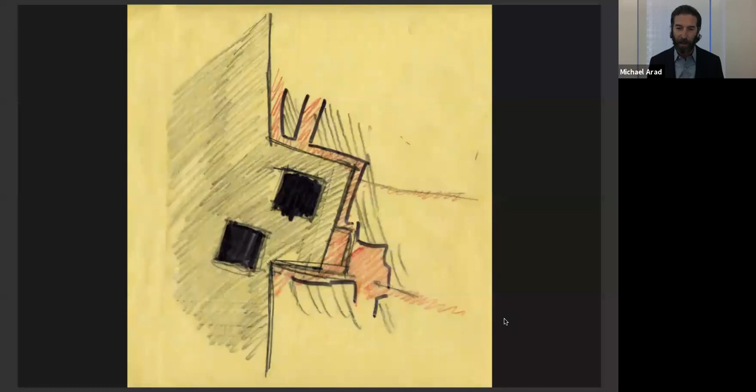I think I felt compelled to think about a memorial because of not just witnessing the attack, but witnessing how New York responded to that attack. So I ended up taking that sketch and building a small model of it, a small fountain that captured that idea of a tear on the surface of the water. I took it up to the rooftop of my apartment building in the East Village, where I had witnessed the second plane strike the South Tower. I could see the absence of those two towers in the skyline somehow mirrored and reflected in these two voids in the foreground. I did this in 2002, 2003.

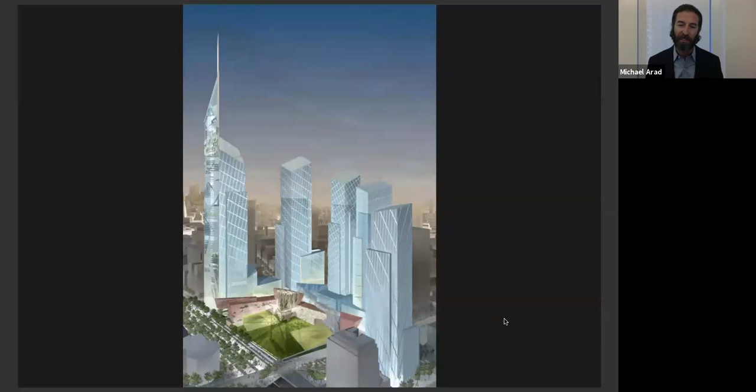This was before a competition was announced for the design of the site. In fact, prior to the competition for the design of the memorial, there was a competition for the design of the master plan for the site. You can see up here on the top left side of the screen, Daniel Libeskind's master plan, which restored the 16-acre super block, the site of the World Trade Center, back into the urban grid by letting Greenwich run through the site, running north-south, as well as Fulton running east-west, in effect subdividing the 16-acre super block into 4 smaller blocks. The largest one, about 8 acres in size, was set aside for the memorial, as you can see in the materials here that were part of that competition brief.

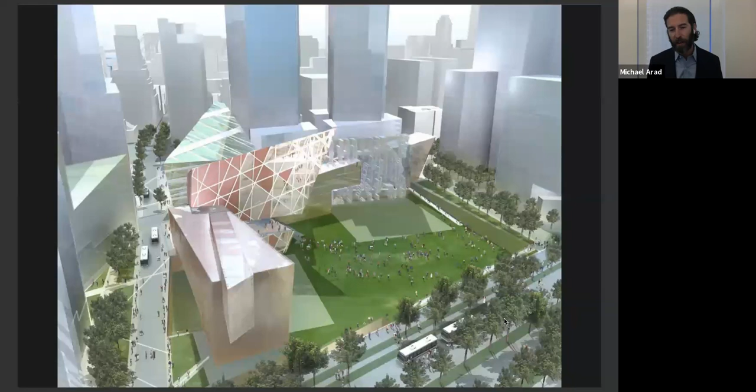However, the master plan also called for the site of the actual footprints of the towers to be some 60 feet below the surrounding streets and sidewalks. An 8-acre depression in the middle of the city.

I thought about my own experiences in New York in the days and months that followed 9/11, and how important public space was to our response to the city. How our ability to go to places like Union Square and Washington Square and stand together and confront the horror and evil we had experienced together was, in my mind, key to the way we here in New York responded to the attack with stoicism, but with compassion. And I thought that when I looked at this master plan, this space did not look like other civic public spaces in New York. It felt disconnected from the city.

And so, almost as a polemical response, I sent in a proposal that suggested raising everything up to ground level, to the surrounding streets and sidewalks, to create a civic public space that would connect to the urban fabric, that would be part of New York.

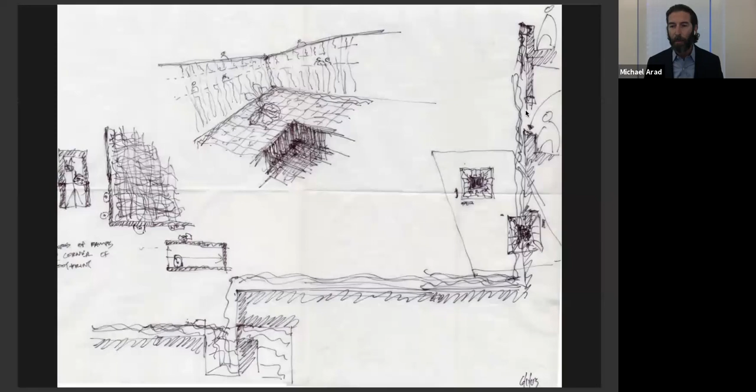And matching that idea of the civic public space with this idea of how do you mark loss and absence, with the voids that I had imagined in the Hudson River the year prior—could I bring them to the site to mark the footprints of the towers? So you could see people standing around the voids, looking down at it, or perhaps behind the waterfall, looking past the names at the void beyond.

The competition guidelines asked for a 30 by 40 inch board to be sent in at the end of June 2003. On this board, I showed an image of that fountain I had previously designed and talked about the notions of making absence visible and tangible, and how this memorial would fit into the city.

And the last few words in this description actually talk about people on their way to work or play, to suggest that this memorial had to serve multiple constituencies—that it could not just be a memorial for visitors on that once-in-a-lifetime pilgrimage, but that it had to serve people who work in this neighborhood, who live in this neighborhood, who cross the site daily.

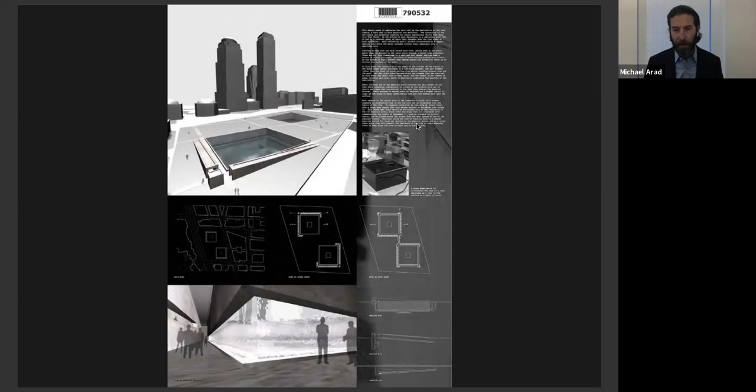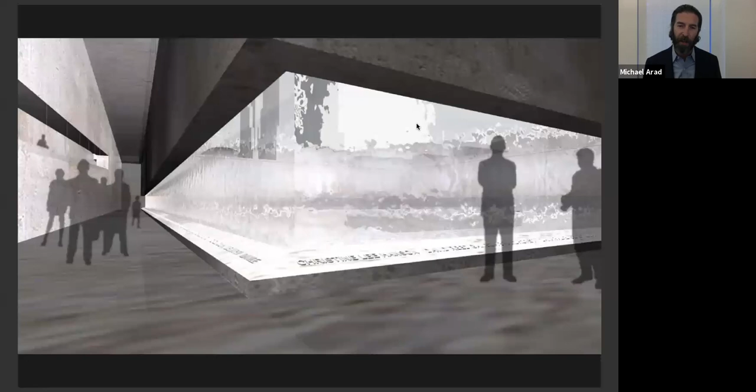And so you could see this plaza at grade punctured by these two large voids, and then a set of memorial galleries surrounding each void, where one could stand behind the waterfall and encounter the names of the deceased.

I was one of 8 finalists that the LMDC selected, and at that point in late 2003, I got to visit the site months after the recovery effort had ended. You could still see some of the parking slabs that had been below the World Trade Center plaza, on the left side of the image.

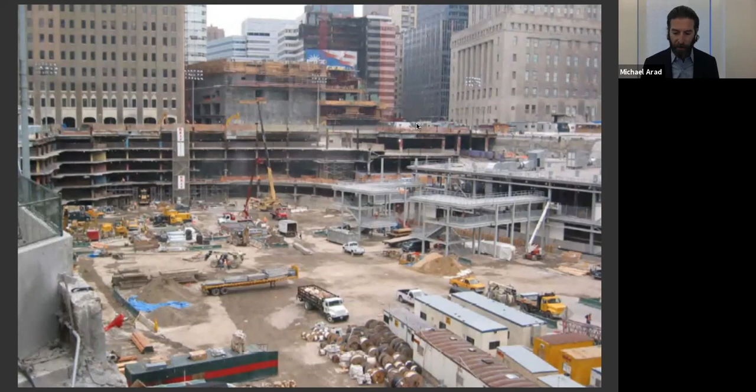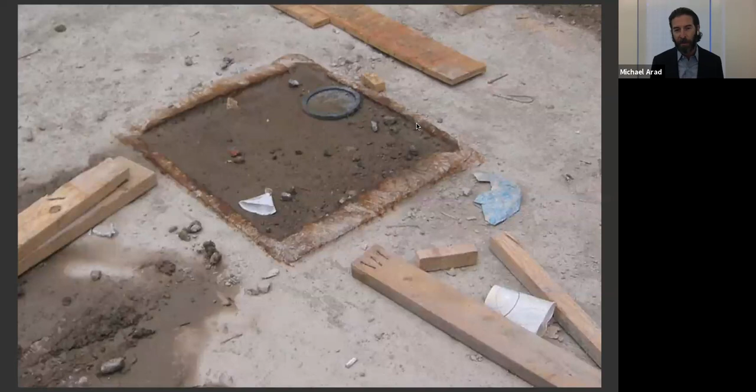You could see this slurry wall, an artifact that had been hidden underground for over 30 years and became exposed during the recovery effort. And you could see these cut-off steel columns that had connected the tower to its foundation. In the recovery effort, these steel columns were torch-cut with an acetylene torch, leaving this jagged, rough mark behind. You could put a new steel box column here and erase in some way the history of what happened here.

And I saw something very eloquent in this absence and tried to capture it in this design. I had a month to prepare additional materials for a review by the jury and the LMDC staff.

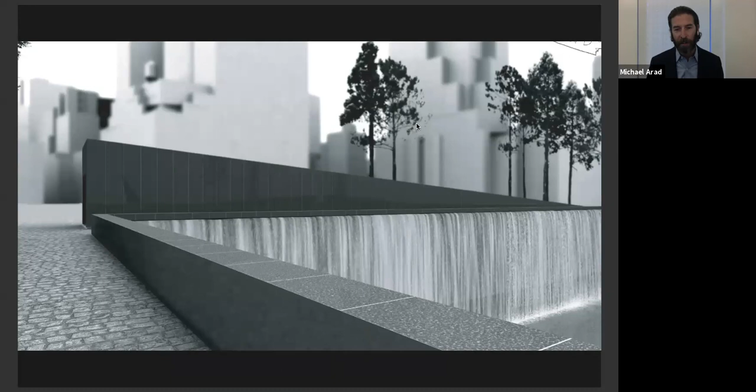These materials are from that time period, imagining the materiality of the stone that would ring the fountains and the underfoot, the ramps that would lead you down from light through darkness, and up to the edge of the pool back to light, where one would encounter the hundreds of names that surround each pool and see the city beyond—see this empty space, almost an acre in size, marking the footprint of the towers.

As a threshold of sorts, a line that you could walk up to but not cross—a line separating the living from the dead, the present from the past. A line of enormous significance, a place of enormous significance. I think this is at the heart of the experience of visiting this memorial: this encounter with a name.

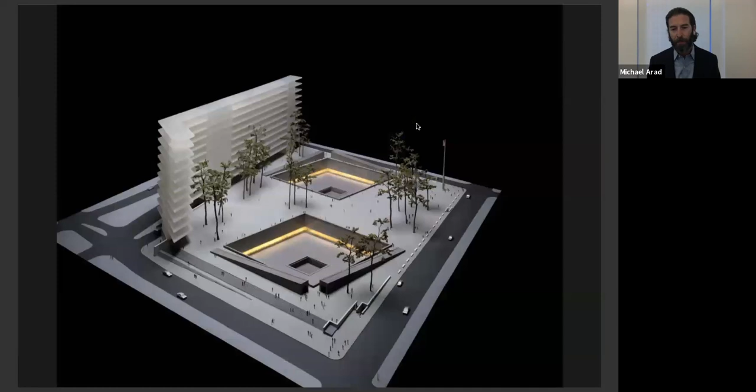And the return to the plaza changed by that journey. The jury looked at these materials and said, you talk about this site being very much a living part of the city, yet this landscape design that we see with these tall eastern white pine trees still feels very sparse.

Much as if it's dedicated solely to memorial use, and challenged us to rethink it. At this point I brought on Peter Walker to join my team, to think of how we could treat the landscape design in a way that would enliven that plaza. My concern was, how do we do that without undercutting that first and primary gesture of the flat plane and the two voids?

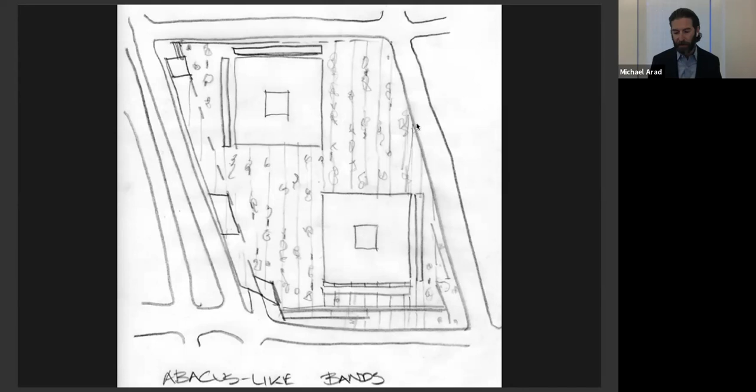And we came up with this idea that we called abacus-like bands, where the trees are arranged in rows at random intervals, the same way that beads could slide along the wires of an abacus and stop here or there, but along a line. I came back to the jury with this rendering and this model and presented to them. In early January of 2004, they selected the design, and we went to work.

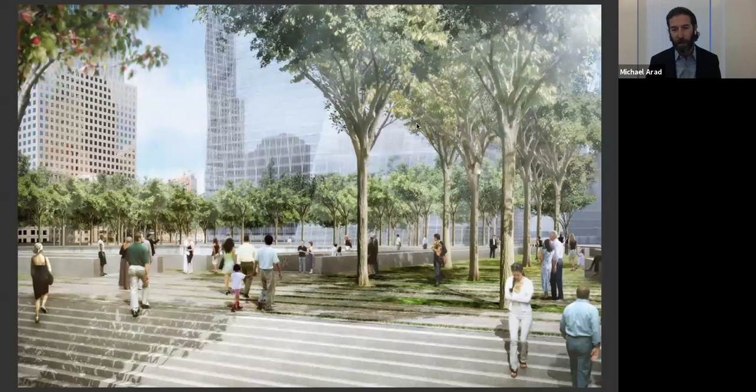Realizing this design in all of its various aspects, from the most sacred and difficult, such as where the unidentified remains might be stored. This was an idea we had explored at the time, that they would be in a vessel below one of the central voids, to the much more quotidian concerns.

Where would school groups gather? Where would the information desk be? Where would bathrooms be located? One of the first tasks that we tackled was the engineering behind the waterfall.

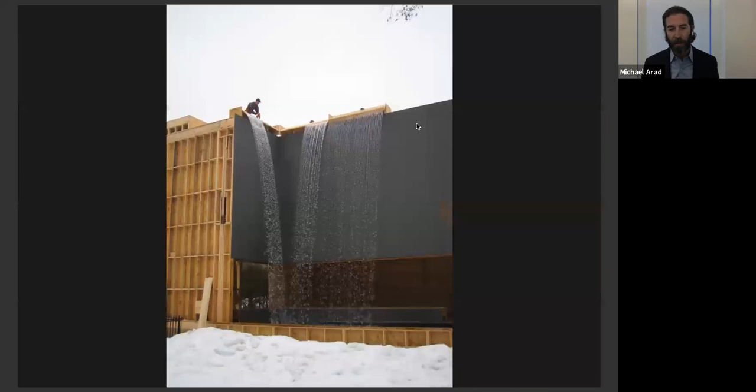We ended up choosing that second option, in part because we wanted the splash line from the water to be further away from the memorial galleries and the visitors.

We tested the fountain in our fountain designer's backyard in Toronto, Canada, in the winter and in the summer. Water is one of those materials that you can't scale down how it behaves, you have to test everything full scale with the materials you're using. So these are studies of various profiles for the serration along the edge of the weir.

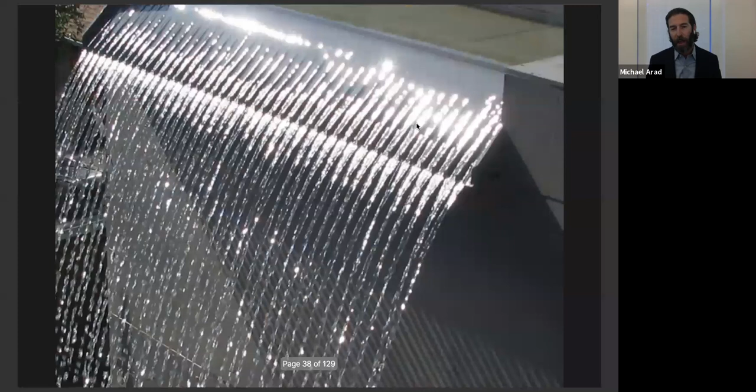What came out of this investigation was a design where you can see clearly each and every strand of water as it comes off the edge of the weir and separates into individual streams. But as it falls down some 30 feet, halfway down, the clarity of each individual line dissipates, and you have this woven tapestry of water, bringing all these separate lines together.

The idea of commemorating both individual and communal loss was something that was always in my mind, but I had no idea that we would find a way to bring it to the foreground through this part of the design.

We were working on the design of bronze panels that would list the names of the deceased, and you can imagine what it would be like to stand in that memorial gallery looking at these panels, looking through this sheer curtain of water at the city beyond.

For a variety of reasons, having to do with security concerns, budget overruns, and simply struggles with other projects being built on the site, we were told that the memorial galleries had to be removed from the design and that the names would have to be brought up to plaza level.

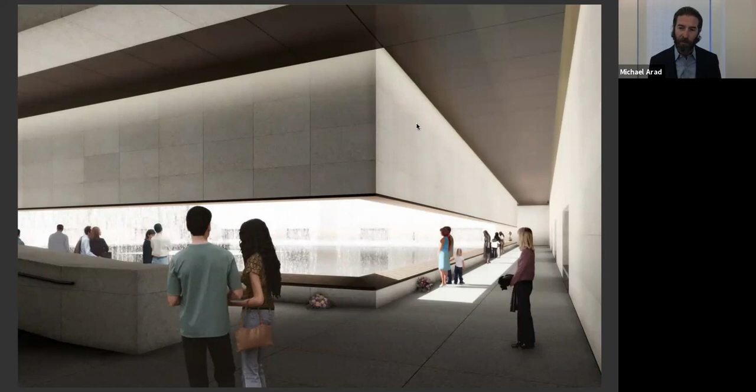When those memorial galleries were eliminated, I found myself standing at the edge of the void, not knowing what would we put there, how would we arrange the names to capture that.

We pursued this direction for close to a year when a determination was made that it posed a risk of itself, and we were asked to create another design that was 42 inches above plaza level. You can imagine the scrutiny and pressure we were under during this period. People went from saying it's too soon to discuss the memorial to collectively saying, why is it taking so long?

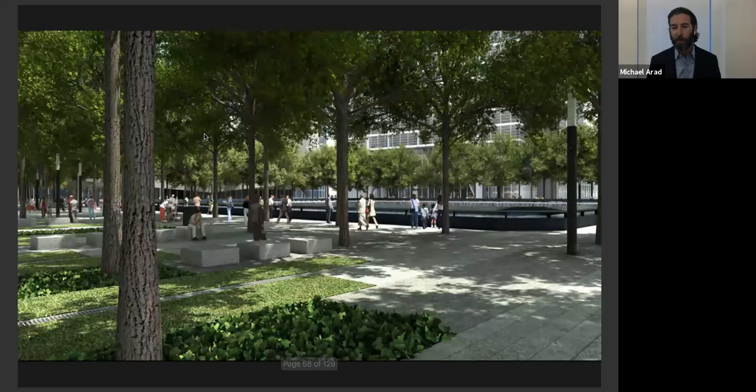But I do think the memorial you see on the plaza today has been informed by every iteration, every study, and every investigation we engaged in over these years. It is an 8-foot wide and 2-foot tall water table that rings the void, and floating above that is a bronze wing that comes to that height of 42 inches. That bronze wing has the names cut out of it, and they appear as shadows during the day. At night, this panel is illuminated from within and the names appear as light.

How the names appear on these panels is probably the most emotionally difficult and charged question of this entire design process.

I had proposed initially something I called meaningful adjacency, and that idea was rejected—the idea of reaching out to family members and asking them if there were names of other people who perished that day that they would like to see next to the name of the person they lost.

The LMDC at the time was in charge of the process prior to handing it over to the Memorial Foundation, and they had interactions with dozens of different family groups unhappy with how they were administering the recovery downtown. So when I asked them to reach out to each and every family group, there was a lot of reluctance to do that. I was told it would be impossible to implement and that we should come up with another way of arranging the names.

I could not think of another way to arrange names that wouldn't inadvertently bring some names together and separate others. Some families that shared a last name would be listed next to each other, while other families that didn't would not be—if you relied on something as simple as an alphabetical listing. An alphabetical listing wouldn't distinguish between people who share the same first and last name, and there are 3 Michael Lynches on this memorial.

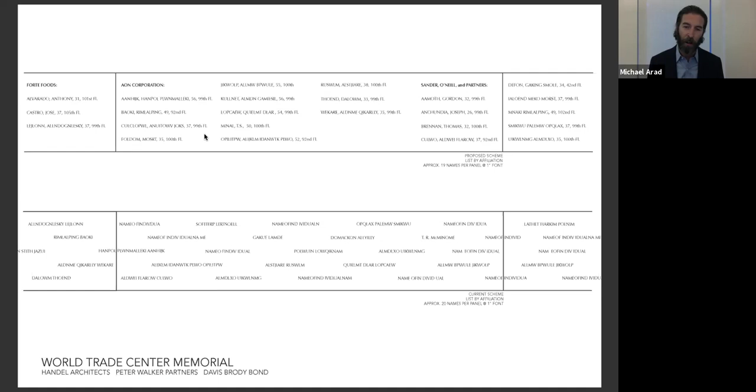So even graphically, the idea of stacking names in columns versus letting each name have its own place was important to me. When Mayor Bloomberg became chairman of the Memorial Foundation in 2006, this was one of the first issues he wanted to address—the names arrangement. It had actually brought fundraising for the memorial to a complete standstill.

We decided to arrange the names into 9 broad groups, reflecting where people were geographically that day: the 4 flights, the 2 towers, and the Pentagon. The first responders in turn are grouped by where they came from—the same firehouse or the same precinct building.

But the mayor was open to the idea of reintroducing meaningful adjacency into the design within the rubric of these 9 geographical groups. Some of these groups have hundreds of names in them.

So letters went out to family members asking them to verify how they would like to see the name of their loved one spelled, whether a nickname would be used or not, but also if there were any meaningful adjacency requests they wanted to share with us. We got over 1,200 requests.

We began this process without really knowing how successful we would be in implementing this request. We arranged the names by hand. One person in our office, Amanda Sack, spent months and months printing every name at a quarter scale—the scale it appears at the Memorial Foundation—trying to meet each and every adjacency request.

Even when no adjacency request was made, we reached out to friends and coworkers and asked for information—who sat next to whom, who worked with whom—so that the names would be grouped together in a hidden web of connection.

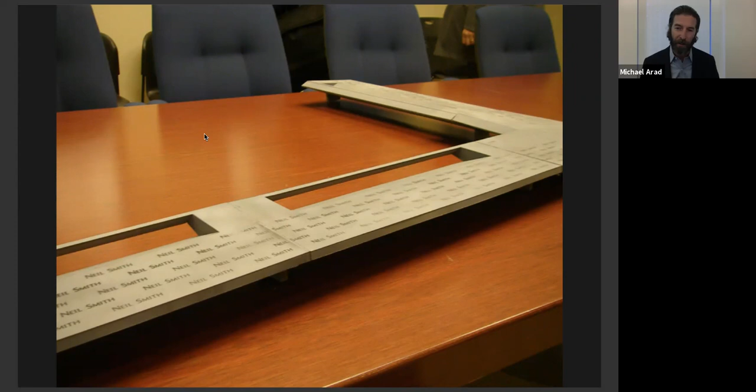Here you see an idea of cutting slots through the names panels that would allow for that downward directed gaze. But these design ideas didn't really feel like they were appropriate or in the grammar of the design that we had developed. I'm incredibly grateful that we were given the time to sort of formulate the appropriate design response under a lot of pressure.

It was people like Amanda Burden and Kate Levin, who worked for Mayor Bloomberg at the time, that oversaw this process and gave us the time to respond.

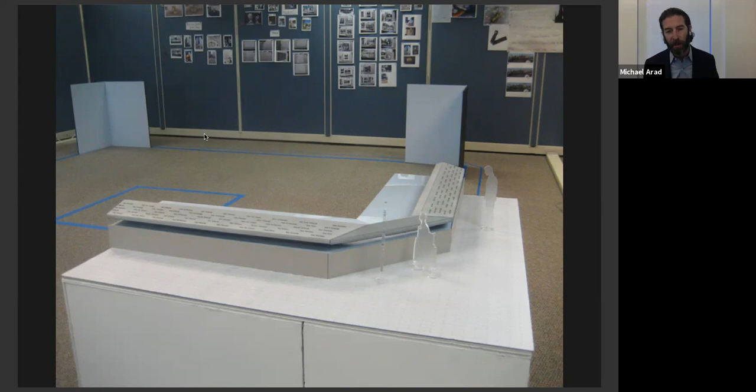The idea that we came up with was to actually chamfer the corners of the pools, to bring somebody who is seated in a wheelchair closer to the edge of the weir and to allow them a view of that secondary void at the center of each pool. Then we realized the towers had chamfered corners, and in some way we were echoing the past by doing that.

We went to the MOPD, Mayor's Office of People with Disabilities, very proud of having developed this idea. And they said, well, not everybody can turn their neck sideways to see the void, which felt like, oh my God, but hey, we had already cut the corner in plan, why not cut it also in section so it actually cantilevers out almost like the prow of a ship. In doing so, we actually created this ability to transition from 5 rows of names to 3 and then back to 5 to create a closed circle of names around the memorial pools, which was much more poetically appropriate.

I bring this up to say that design always is how do you respond to a set of constraints on any project. Typically it's schedule and budget, but here there were many other concerns which were much more important. That is, I think, at the heart of what a designer does. It's how do you respond to a set of constraints?

Although we did not welcome this request, I think the memorial is better for having grappled with it and finding a solution to it, both visually and obviously programmatically, but also poetically. We opened the memorial almost 10 years ago tomorrow.

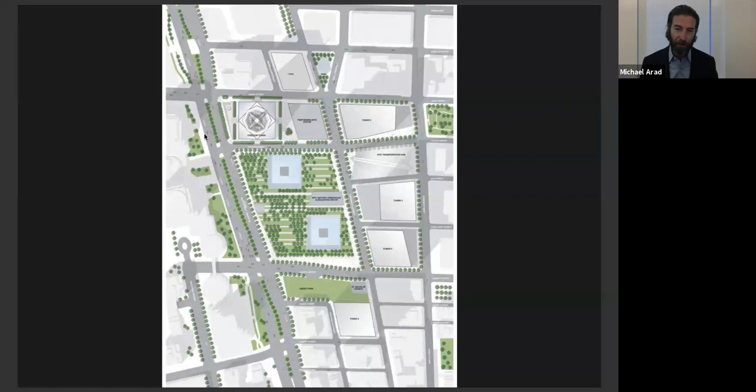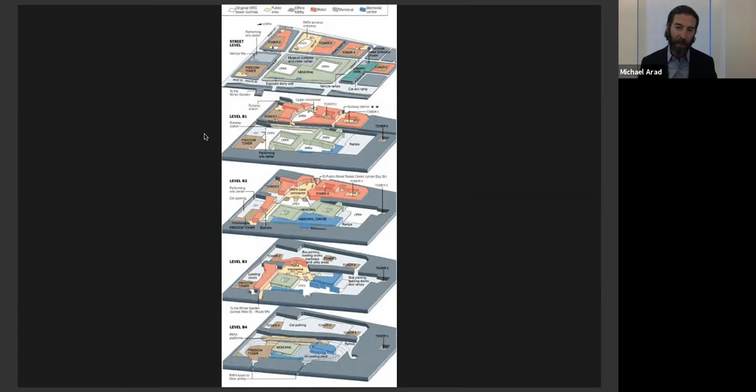What appears like terra firma in the middle of the city is actually a green roof above a very complicated set of infrastructure and other program uses, the museum, the chiller plant, a mall, a subway line, PATH train to New Jersey. But all of that complexity is suppressed and is not telegraphed up.

For me, I think the memorial is a place where you can look to see the past, see what is absent.

If I would have shown you this presentation two years ago, I would have stopped here. But the memorial has changed, in part because it failed to answer a need that we did not anticipate, which is a number of people who have grown ill.

Over 1,000 have died. Thousands more will die of 9/11 related illnesses they contracted in Lower Manhattan, many while coming to the site as rescue and recovery workers. But neighborhood residents, high school kids who went to Stuyvesant—the number of people who have been stricken by these illnesses is vast. And the memorial failed to address that in any way.

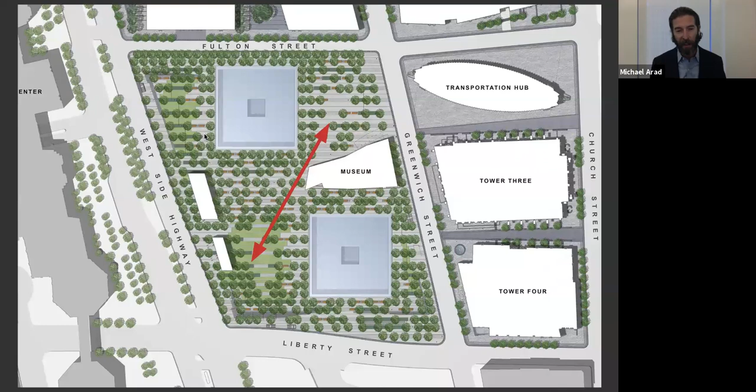So it would have to be a very different memorial, and it would also have to establish its own sense of place and autonomy, but also be part of the larger ensemble of the World Trade Center Memorial. I was drawn to the memorial glade that had existed since we opened the memorial, at the southwest portion of the plaza, but was not much in use in the day-to-day life of the memorial. It is a series of paving bands and grass strips.

During the year, people are prohibited from walking on them, and only once a year, on September 11, would it be open to the public. It was gratifying to see the public use it on that day, but it felt like this area, where the trees are pulled back and you can stand under the open sky, was the right place to explore in addition to the memorial.

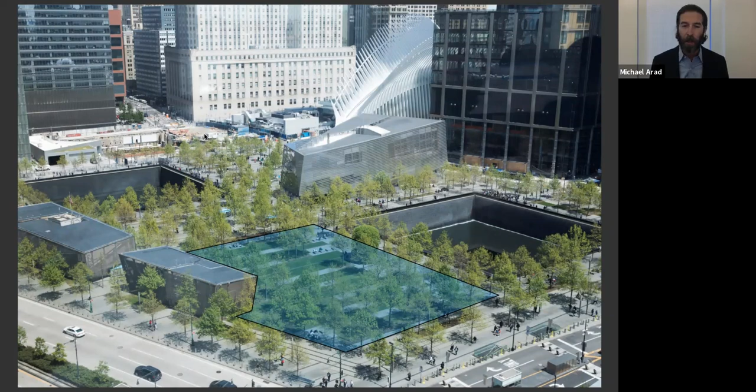So we thought about creating a path through here. The Memorial Plaza is characterized very much by how flat it is, so that those two voids really stand out. I was drawn to something that would actually break that flatness, sort of erupt up and in some way exhibit a sense of forceful resistance, which is what I associated with the story of the recovery.

So we started to explore ideas of something that would break and erupt out of the surface of the plaza, that would be beaten and bruised, but strong and resilient. It became a series of monoliths and a new path that you would walk through this space.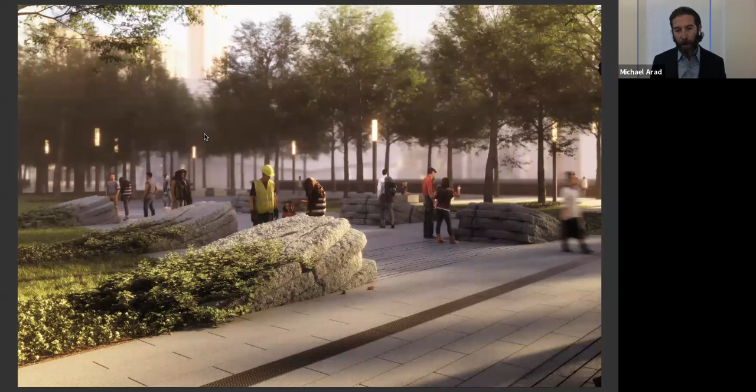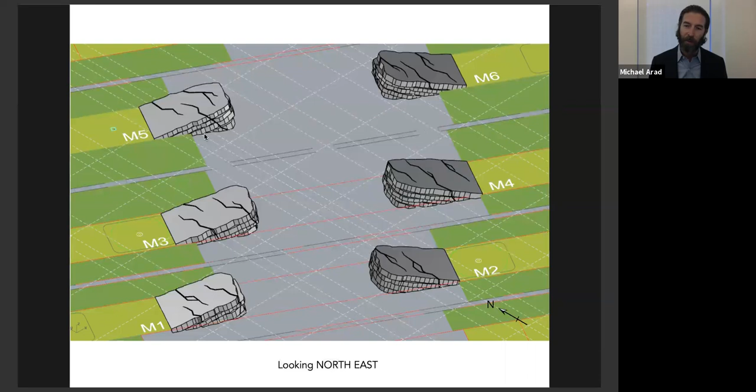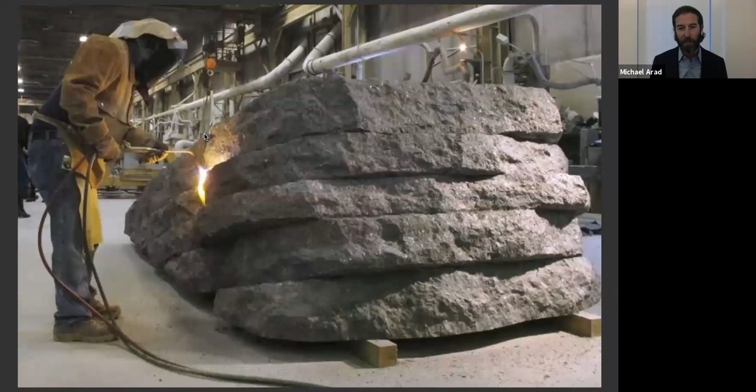This process engaged a lot of the recovery workers who were involved. One thing that became clear was how important World Trade Center steel was to them too—it had an almost emblematic quality to it. So we were asked to use World Trade Center steel to bind together these slabs of stone that form these monoliths, and a few pictures from the fabrication process show what looks like natural cleft stone, but isn't.

The steel being poured for these sinews that tie together these stone slabs. And here you can see a photograph of the Memorial Glade shortly after it was dedicated, on the day that it was dedicated.

And just seeing how people interact with the memorial, all these hands on the stone and the steel, is incredibly powerful and moving to me. I just want to share one last thing before we jump to Q&A.

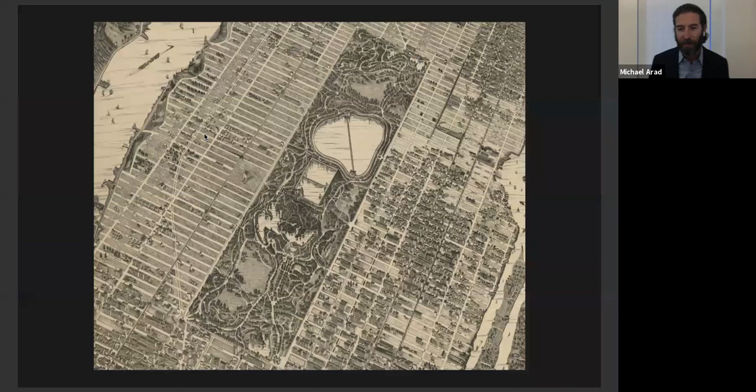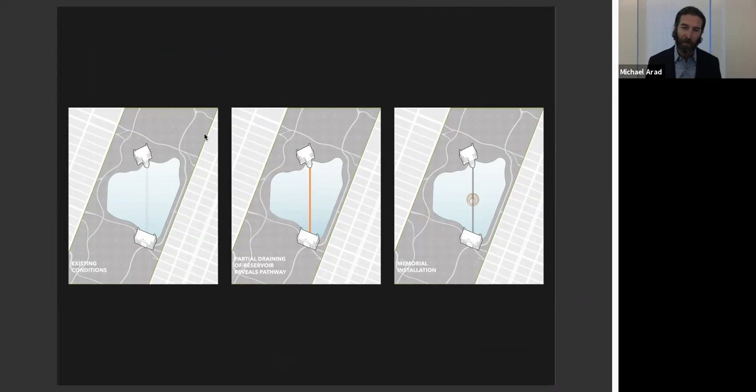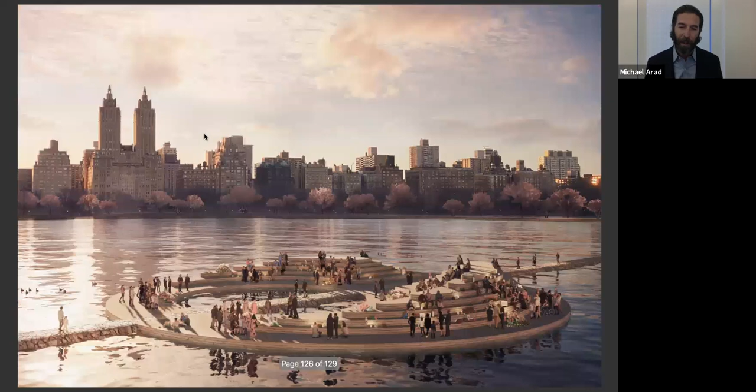I was asked to design a temporary COVID memorial recently, and was drawn to the New York City Reservoir at Central Park, where when the water is drained a few feet, a submerged dam that subdivides the reservoir becomes visible. I thought of creating a temporary memorial that once a year in March, for a week, becomes visible. It's a place where we can go and commemorate those we have lost—an island where you can go alone or with a couple of friends or with a group and form your own set of rituals, a place you can be in New York but away from the city simultaneously.

So thank you. I wanted to end on this note: I think public space is important because it informs us who we are and our sense of identity, and that is an important civic quality that architecture has a responsibility to further. Thank you.

Thank you, Michael. That was really moving, listening to you tell the journey of the design and construction of the memorial is extremely moving, and I thank you for doing that and for sharing your thoughts with us.